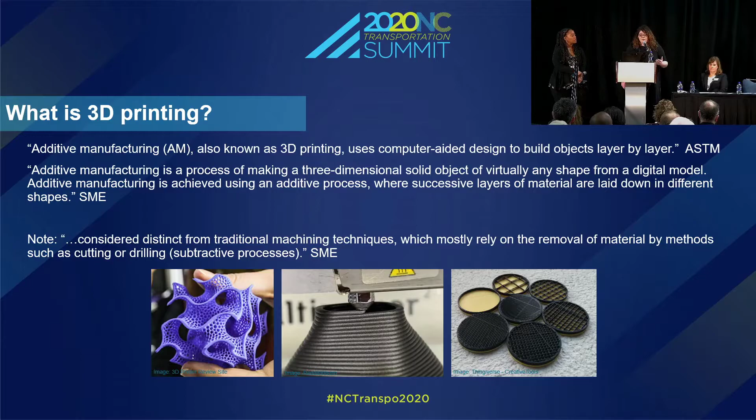So why would you do 3D printing? Well, because it can be faster. If you need a part right now made out of metal, plastic, whatever material, it is likely faster to print a one-off part than to go through the entire conventional manufacturing process to build molds, jigs, design it, drill out the holes. Any kind of complex part requires a lot of time to make. With this, you can get single-step manufacturing. Instead of building a part out of 20 parts, you can make an incredibly complex object that is one part, and these objects fit into the environment where they need to be.

They can also be less expensive. It's much less expensive to print one than to run an entire line to print hundreds if you only need one, and then have hundreds of parts sitting on a shelf that aren't getting used.

With this too, you can get incredibly complex parts. Because you're not using molds or drilling out holes, you can have intricate interior and exterior geometries all in one. So you can have parts that can't be made conventionally, which we'll get into a little bit later. You can also have customization.

There are companies out there that design, say, hearing aids that are custom fit for your ear based on just taking pictures as you go around. That is one version of customization. Things that need to be customized can be, because everybody's parts can be printed on one print bed, but different. So we can print 100 different things on one print bed with the same material and make a custom version for everybody if that's the desire.

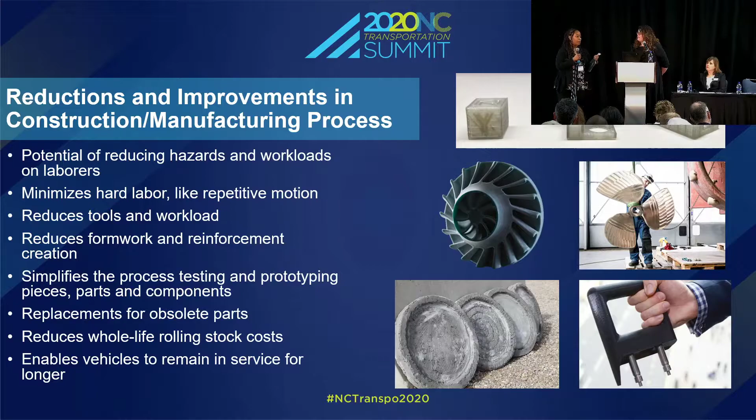So there's a bit of a difference between small scale 3D printing and large scale. Most people, when I ask if they've heard of 3D printing, are aware of small scale 3D printing—3D printers in your own home, or metal 3D printers to print parts. Anything that's really less than a meter cubed is what I'm talking about with small scale.

Now, less common is large scale or large format 3D printing, which is greater than or equal to a meter cubed. So you're talking about, say, a 3D printed propeller that's on a boat—that's the WAMpeller, or WAAM-peller, which was designed to be a more energy efficient propeller to show that you can use this kind of technology in boats.

Or 3D printing cars, which we'll get into a little bit later, all the way up to construction scale 3D printing, which is much, much greater than a meter cubed. That's an extremely rare form of 3D printing—the number of printers in this country that large can probably be counted on your hands.

So I'm going to hand this one over to Brandy.

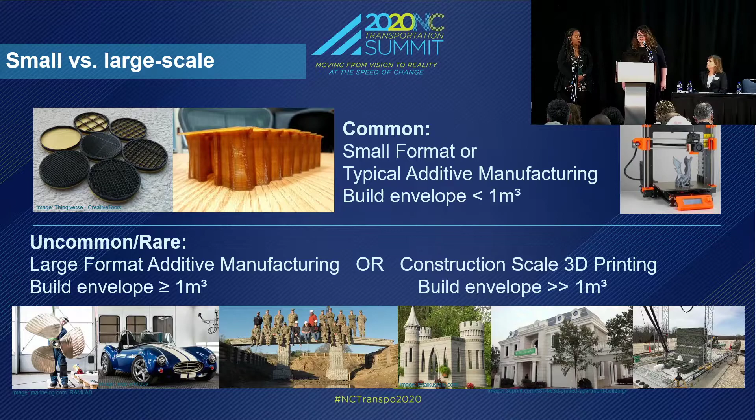Sure. So I have a question for everyone here. Would you rather drive this car on the left? Sure, it gets you from point A to point B, but eventually it's going to have to change—and the way it's going to change is that you're going to have to start driving the car on the right. This car has been 3D printed.

The exterior of the car has been 3D printed. It has a skin that's waterproof. It's also lightweight. So you could stay with the car on the left, your left, my right, or you could drive the car on the right. The thing with this question is that it doesn't matter which one you want to drive. 3D printing is pushing everyone into this new and innovative technology.

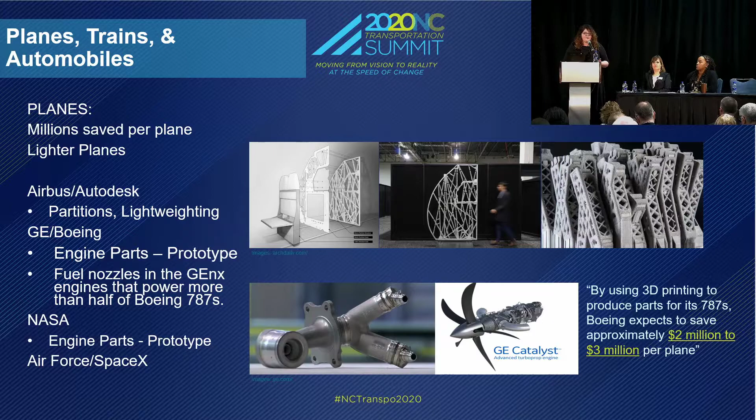We were part of a competition called the 3D Printed Habitat Challenge, where different companies competed to see if they could print space habitats. The reason for that is equipment and astronauts are going to need places to land and live if we are to get more serious about space travel.

That was the wrong way.

Also trains. Typically people think of trains as outdated technology. Well, guess what? Any kind of outdated technology is perfect for 3D printing, because 3D printing is great for creating one-offs, which means if you have trains or tractors that need parts no longer made, you can 3D print these parts easily for a lot less money than making them conventionally.

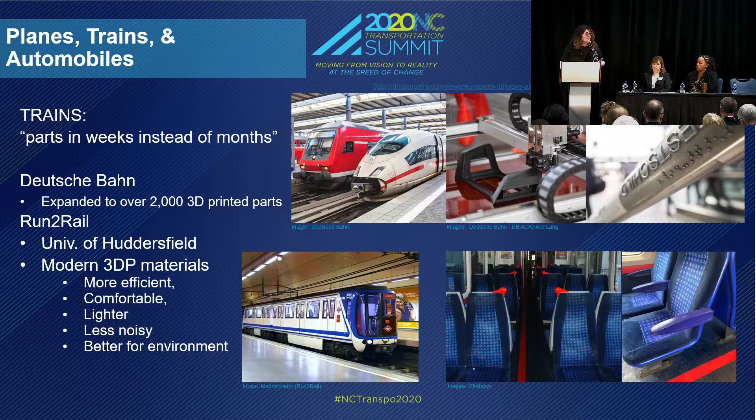Everyone's trying to incorporate 3D printing, not for the sake of 3D printing. A lot of people like to 3D print stuff just to be the first one who's ever 3D printed something. But really where 3D printing takes the cake is when it actually makes the entire process better. One area not really talked about a lot is Olli and Local Motors.

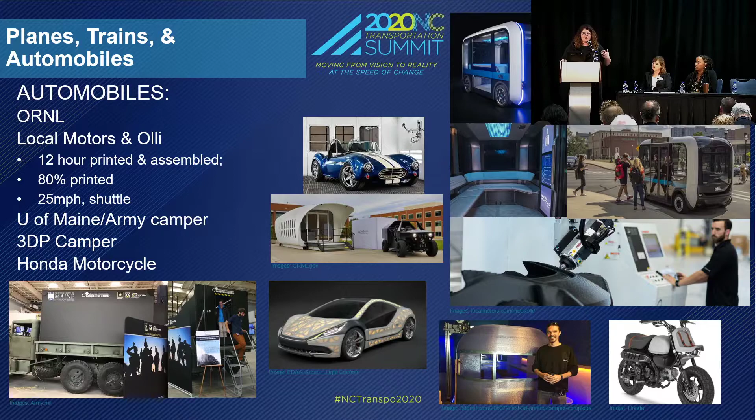What's not being 3D printed in those Ollis? You said 80% is, so what is not being 3D printed? I think it's mostly the battery system, the electrical portion of the Olli. Tires and the glass are not 3D printed. But everything else is, to my understanding. I believe even the rims are probably 3D printed, and if they aren't, they probably will be soon.

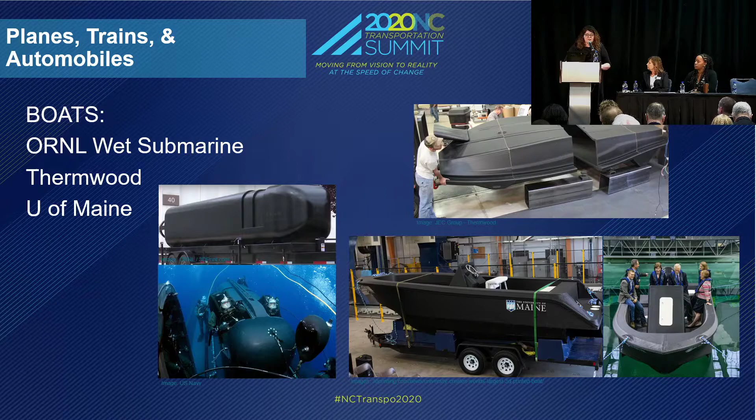Now, like I've mentioned, there's a lot of hype in this industry. People will tell you it's going to revolutionize the world. Well, it's going to revolutionize various aspects of the world, and it might start sneaking in where you haven't seen it yet. Just like the autonomous discussion this morning about how autonomy is already starting to sneak into transportation, 3D printing has done that as well.

Now, when we talk about this as a group, we work with 3D printing for infrastructure, so we're talking about bridges, buildings, etc. So when we talk about hype for our industry, we're talking about people saying we can 3D print a building in 24 hours for $10,000, and it only took 2 people to build this building. I'm going to tell you that's not true. I'm going to tell you that anytime someone says it took me X amount of time to 3D print something, I want you to ask them: how long did it actually take?

Because people have a tendency to talk about print time, which is kind of like the Windows progress bar, where it will tell you it's going to take 5 minutes, and then you've sat there for 3 hours and it still hasn't worked. And it used to be way worse than that. But the point is, if you want a building in actually 24 hours, going by these kinds of terms, saying you can print a building in 24 hours is misleading.

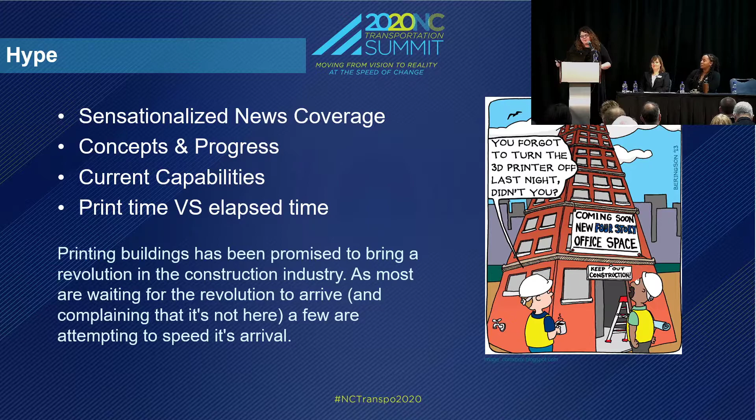And so a lot of the news that's out there, like this little cartoon illustrates: you forgot to turn on the 3D print, turn off the 3D printer, come back the next day, there's a whole building there, a whole skyscraper. It's not quite like that.

Immediately after that is the trough of disillusionment. The trough of disillusionment is where technologies go to die. There have been a lot of great technologies in the past that have been far superior to what we use today that were not adopted because of the trough of disillusionment. Now, what can happen in an industry is people can talk about how great something is to the point where nothing is true anymore, or people don't believe it anymore, and they fall into this trough.

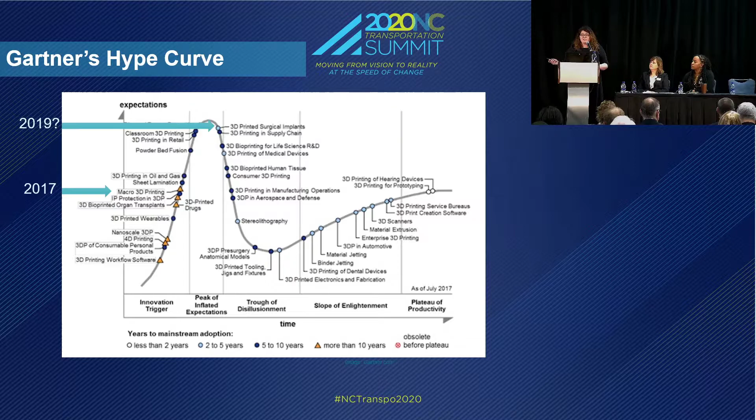Because when we talk about this, we want to talk about real applications, not just the first in the world, the greatest, the largest. We want to talk about where the innovation is actually happening. So how do we get across the trough of disillusionment? That's where collaboration comes in, because through collaboration you can start to understand where applications are and improve technologies to the point where they can be adopted easily. That's what we like to work in.

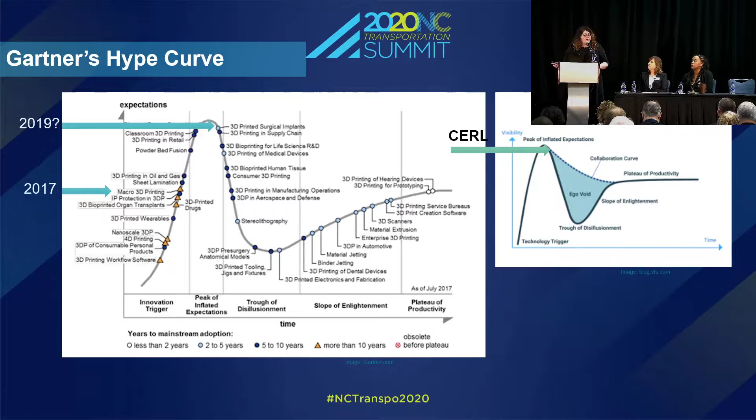So we have a number of collaborators, all the way from Caterpillar to Oak Ridge National Laboratories. We've worked with Skidmore, Owings and Merrill, a structural firm out of Chicago, as well as the University of Illinois. We try to broaden our spectrum, working with everyone from academia to industry to other government labs, in order to make sure that the technology isn't just looking for a problem, but that it's solving a problem, that it's a solution.

So what is additive construction? I told you what 3D printing is. Additive construction is a construction process where a machine uses a 3D CAD model to produce a large-scale component by depositing material in successive layers. We do concrete additive construction, so it's the same thing, but with concrete. You can picture it like putting frosting on a cake, or getting ice cream from an ice cream machine. You build from the bottom up, extruding layer by layer until you've completed a whole object, whether that's an ice cream cone or a frosted cake.

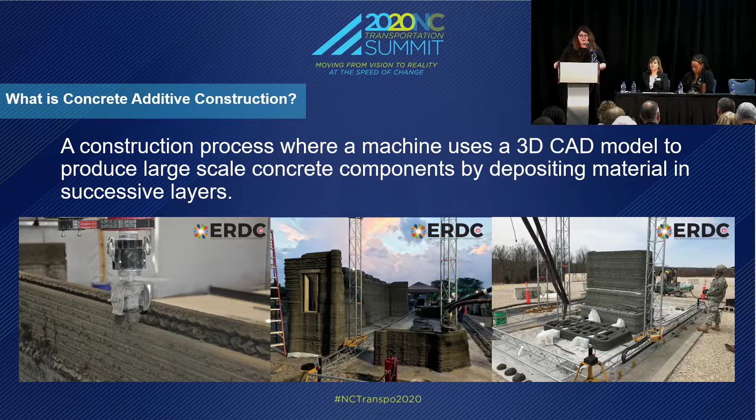We'll get into some terminology here, just for the sake of simplicity. We don't operate in a bubble, we operate with the construction industry, and we want to keep our terminology reminiscent of that industry. Several members of our team are actively involved in the American Concrete Institute as well as ASCE, in order to make sure that as we develop this technology, we are in tune with what industry needs.

For this, we talk about different methods of construction. In regular construction, you have precast concrete specimens that you cast in a factory and bring to the site, then assemble. For 3D printing, you can do something similar, which we call pre-printing objects — you print objects off-site, move them to site, and then put them together, either with conventional components alongside the 3D printed components, or as an entire 3D printed structure.

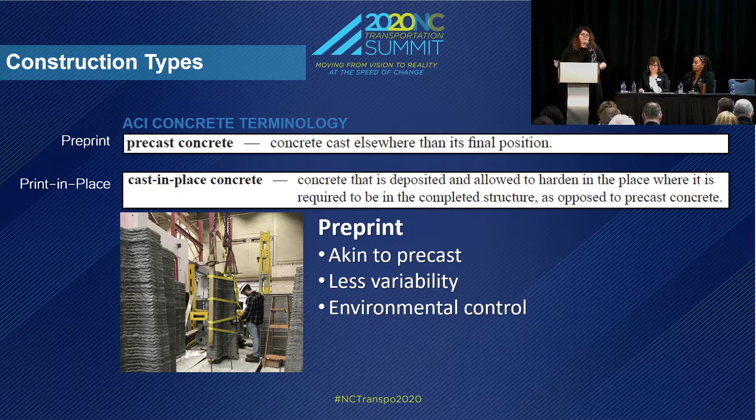The next one is cast-in-place concrete. That's when you're making your foundation — you put up your formwork, cast your foundation, and it stays there forever. We can do something similar, which is print in place, and that's really where we excel in what we do, because most 3D printing technologies are more like a pre-print type technology, where you're printing something that's going to go somewhere completely different. Where a lot of the innovation has happened in additive construction is the ability to print in place.

But with that comes a lot of added variables. Suddenly if you're printing on the ground, we know the ground is not level — even a level slab is not truly level. So we've evolved different methods to deal with these problems, as well as dealing with the weather. If it's raining and you're trying to 3D print concrete, it just turns into mush. If you picture trying to pour a slab and it starts raining, you'd better cover that up because it's just going to lose its strength. As we go through this, a lot of these infrastructure-related issues come to light, and we're working through those to make sure that by the time it hits industry, it won't be a problem.

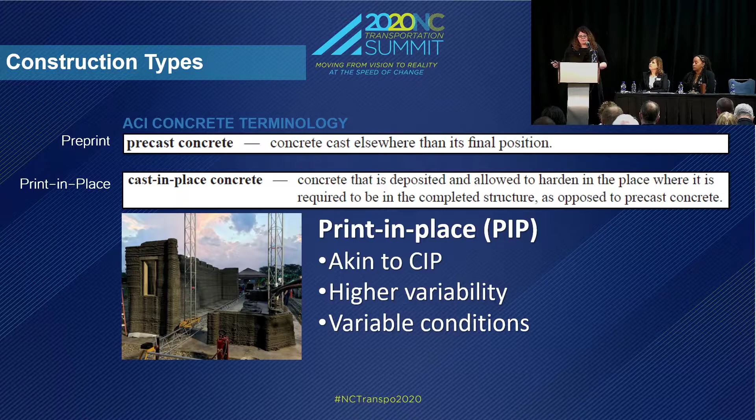With 3D construction, what you really do is take the plans for whatever you're making, whether it's a building or a bridge, and break it out into your different layers. This is a fairly simple plan — we did this as a design for one of our first buildings that we didn't end up actually creating. We printed a few layers and then decided to go with another design. But you can see that as we start from the bottom up, we have to leave gaps — for example, gaps for your HVAC system.

You have to leave gaps for the doors. If you have windows, you need to leave gaps for those too. And so you can break this down into as simple of a 3D model as you can by breaking these into layers. This is what a lot of the 3D printing companies that do construction right now do.

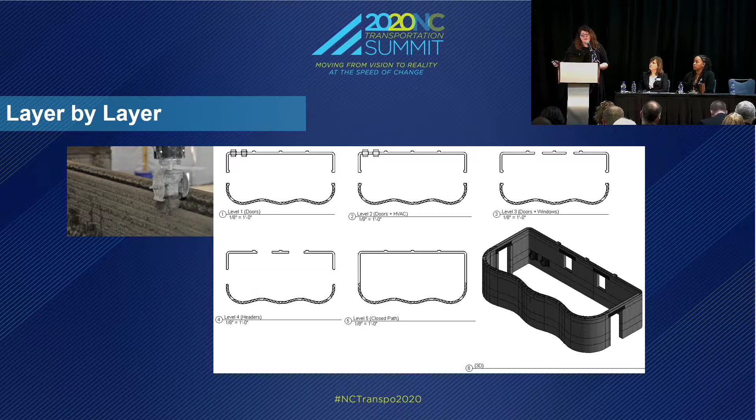They take very few layers and then they just multiply them and print the whole building. Now, we do something a little bit different. We like to create true 3D printed objects, which means every layer could be different. And we'll get into that a little bit later.

So when I talk about hype, there's a lot of companies out there creating buildings and bridges which are prone to this level of hype.

Winsun is a company out of China that has 3D printed an enormous amount of buildings and other infrastructure. Now, a lot of what they say has to be taken with a grain of salt because not everything that they show is actually 3D printed. So you kind of have to look for what the actual 3D printed components are. But overall, they've made huge strides in evolving this technology and showing to the public that you can use this technology to create everything from a mansion all the way down to single homes.

But a lot of these companies end up getting stuck in the competitive stride of trying to sell their current technology based on their projected forecasts for the future. So when people say I can 3D print a building in 24 hours for $10,000, that means I think in 10 years I could probably do that. But today it's going to take a week and $100,000.

But if they told you the real part of it, it's still interesting. And that's the part that I want to emphasize, is while there's so much hype, there's still a lot of really good stuff happening in the field, and you just have to look down a little bit deeper.

So one of the companies that has had a lot of hype associated with it is Icon. When I say 24 hours and $10,000, that comes from Icon. Their houses are beautiful. They can print their houses in just a couple weeks, and they can print them at fairly low cost, and projecting out to the future, it's even lower cost.

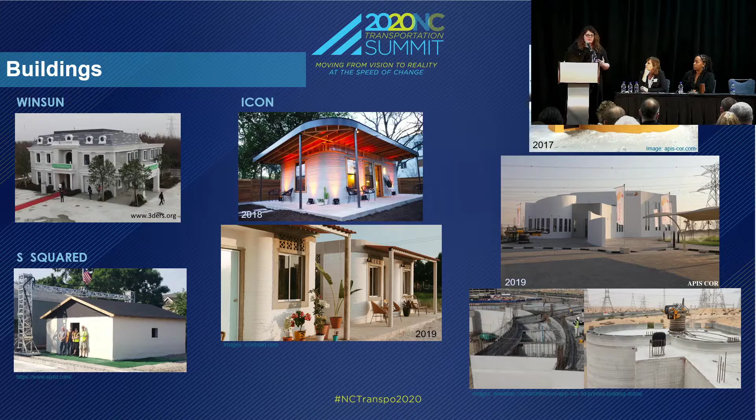And right now in this kind of innovation stage that we're in, you're going to see a lot of square buildings where people are trying to create things that can be produced conventionally. But that's because it is cost effective.

Now, transportation is more along the lines of bridges, roads, right? And so we're going to get into a lot of bridges. So MX3D is a company that came about in about 2014, 2015.

I got this emailed to me at least 100 times over a couple weeks, telling me that people were 3D printing metal bridges. They weren't. It was a concept at that point. They had printed very small things, but the public had already accepted the fact that we've 3D printed metal bridges. These things exist. We're there.

It's the future already. Well, in 2019, just last year, they completed the bridge. It looks completely different. They didn't print it over a canal, they printed it in a factory type of environment.

And while all of that is great, there's real innovation with that bridge. So the things that it was being sold on were things like printing it over a canal. The real innovation there is that it's an optimized bridge for structural engineers.

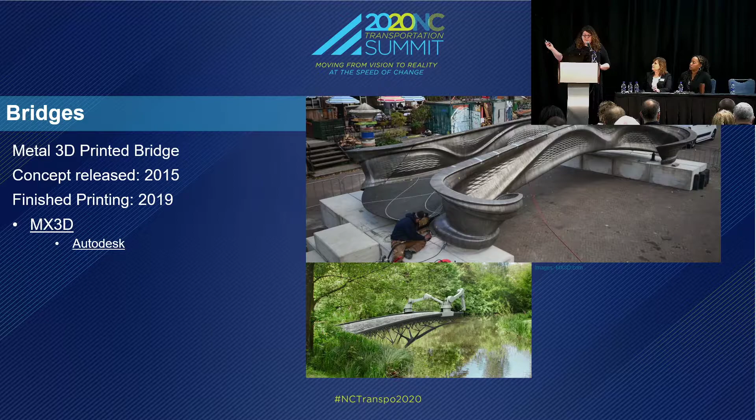And so they worked with Autodesk, and they are still testing this bridge in order to install it over the canal in Amsterdam. But they aren't the only bridge. There's a lot of bridges out there.

This is the world's first 3D printed bridge, in Madrid. That was what went around the news. The really interesting part about this is, like I said, the optimization side of it.

So this was printed in panels and then installed, but all of these panels, each one is optimized. To produce that conventionally, you would have to have an independent mold for every section and then have to cast it, demold it, and everything, if you could even do that.

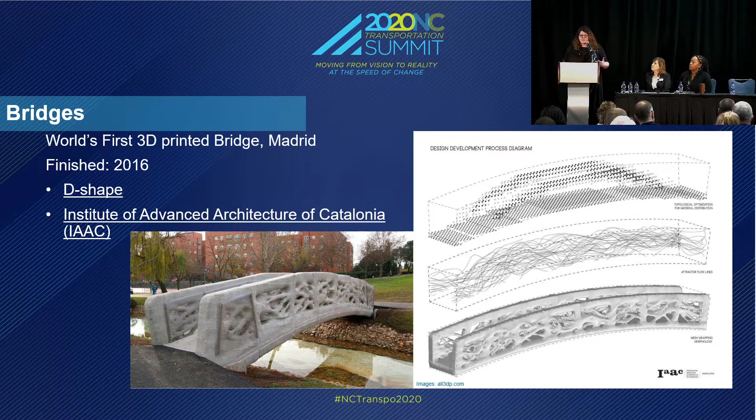And so when we talk about this, we're talking about where are we actually going for the future? And we're going to a future that is more optimized for architects and engineers.

So architects, they're the dreamers, right? They create all these designs, and they're told, no, it's too expensive, we can never do that. Redesign it, over and over again.

And then they get integrated with the structural engineers. Structural engineers say, that's not gonna work, we can't do that. And by the time you get to your end product, it looks completely different than the original vision. Now, those original visions are more real now, because we can produce things this way.

This is a cementitious bridge that was installed in China. The news talks about how it's the world's largest 3D printed bridge. This was just completed last year. One thing that I don't show in the pictures is that this isn't a concrete bridge, right? Weird, right?

They say it's the world's largest 3D printed bridge. Well, when you look at how they constructed it, sure looks like they put a steel bridge across that area, and then they put over this concrete cover. So can you really call it a 3D printed bridge when the majority of the structural portion isn't 3D printed? It's just the shell that's 3D printed. But once again, talking about the world's largest, it doesn't add any value, right?

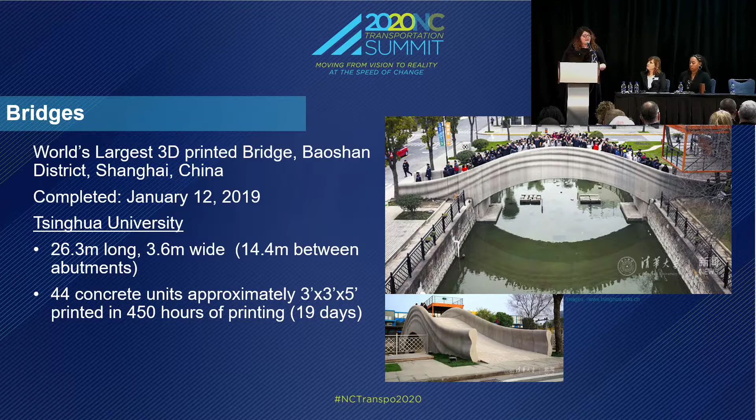But you look at that design, that's a very beautiful design for a bridge. Producing that conventionally for that size of a gap, they'd probably tell you it's too expensive. And you can get far more complicated because these are just the prototypes, right? These are just the firsts or seconds that these companies or universities have done, and they can only get more elaborate from there.

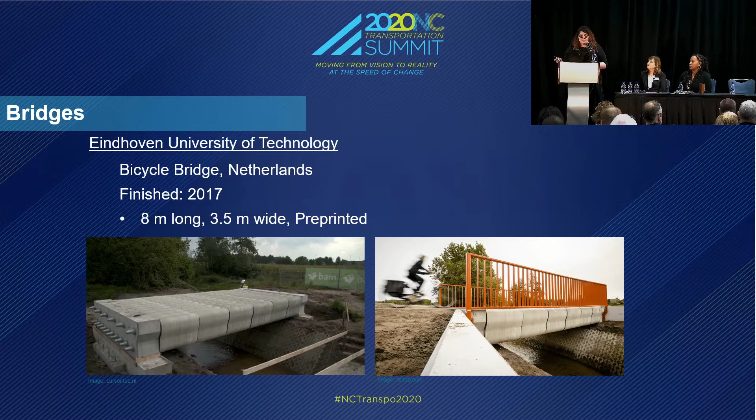Here's a bridge done by Eindhoven that was a bicycle bridge, and basically each section of it was printed and then installed on site. So this was pre-printed. This one, you get what you see, right? It's actually what they talk about is actually what happened. And so these bridges, more and more, are starting to show up in the environment around us. Not just bridges actually being printed, but also the molds, tooling, formwork, as well as direct printed objects.

When we talk about formwork, we can kind of revolutionize it in a way because we're not talking about just wood or steel. We're suddenly talking about creating a polymer 3D printed mold that we can put all different kinds of chambers into, so we can heat and cool it and be able to remove things from the mold and get much more uses.

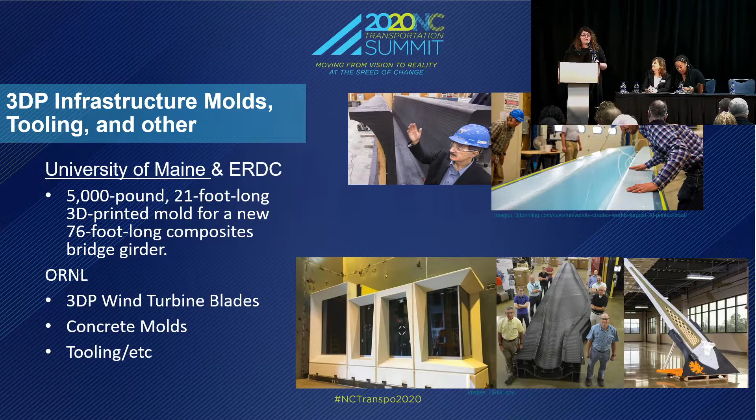We're not as fancy, you know, we're the Army. So what we do is create things that are intended to be for the final structure. These structures may not be used very long, they might be used for two years. So we try to create objects that can be used for what we call expeditionary type operations. This whole program we're involved in was started out being called the Automated Construction of Expeditionary Structures Program, and the idea is to demonstrate and test the capability to print custom designed expeditionary structures on demand in the field using locally available materials. Doesn't matter what object - we're talking about buildings, obstacles, different culverts, and other infrastructure.

And why would the Army do this, right? Seems kind of strange. Part of it is because we can save lives by doing this. If we can reduce the amount of hard labor and the amount of people it takes to create these kinds of constructions, that's less people we're putting in harm's way, whether it's for a disaster relief type operation or infrastructure improvements in other companies or other countries. We could use this technology to improve things across the board.

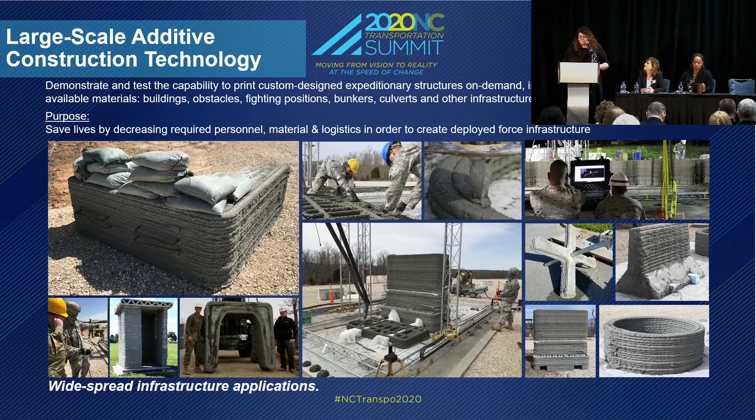And so here's a little video about where we've come from and where we're going.

So we started in about 2015 by building our own 3D printer. Back in 2015, you really couldn't get a large-scale printer. Like I said, right now there's probably, you can count large-scale printers on probably both your hands.

So we designed and built this in-house with our own people. We can print objects with it about 20 foot by 40 foot by 10 foot tall.

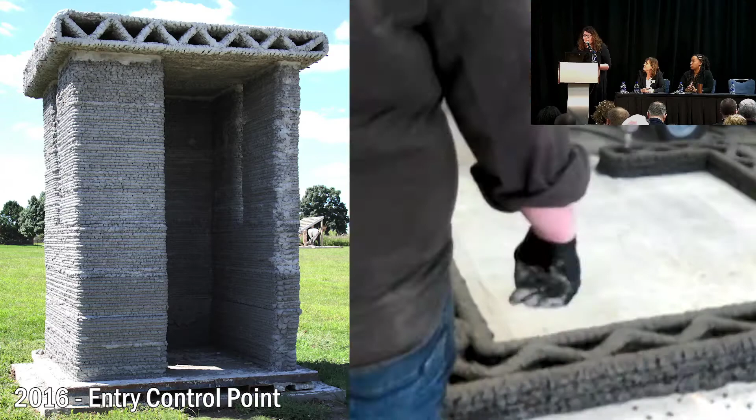We started out by printing a small building called an entry control point, which we printed over several weeks. That was our test structure before we got to our full-scale building.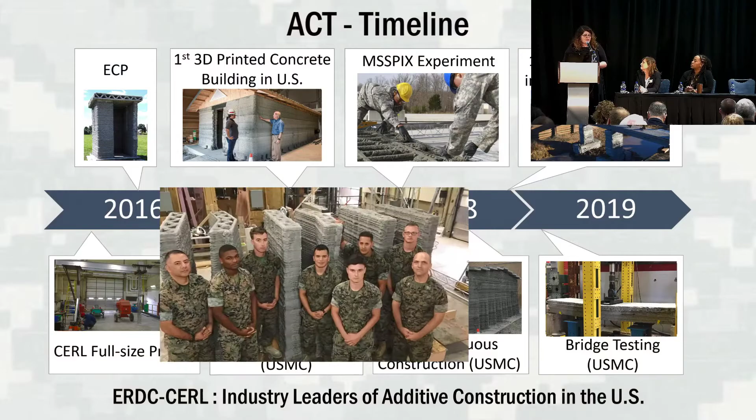Now, remember I talked about print time. That building we printed took 21.5 print hours, but we really printed it over several months because we were building it with our own people.

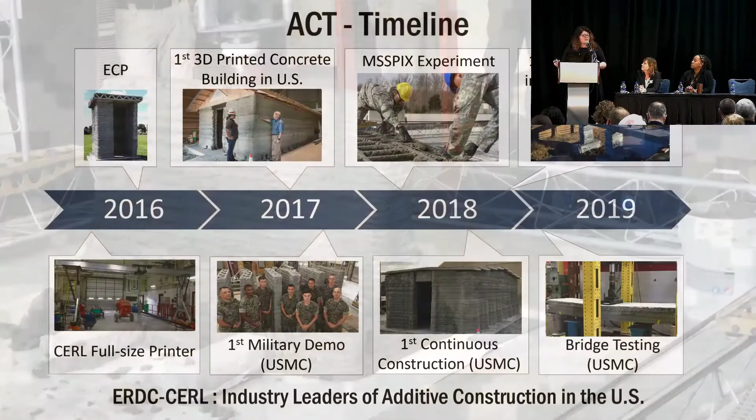From there, we decided we wanted to start incorporating military personnel. So we got the Marines to join us as well as some Army personnel in order to print different objects.

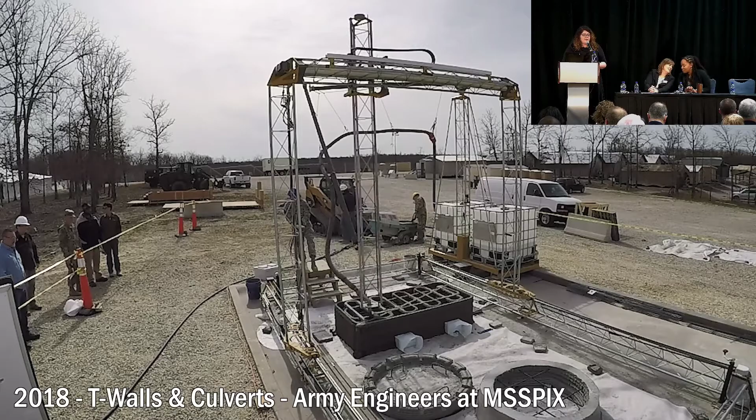We printed some test wall samples to facilitate later construction, and we took this out to Fort Leonard Wood where we printed on site on both a foundation and on unleveled gravel to print different objects, from culverts to Jersey barriers to large T-walls.

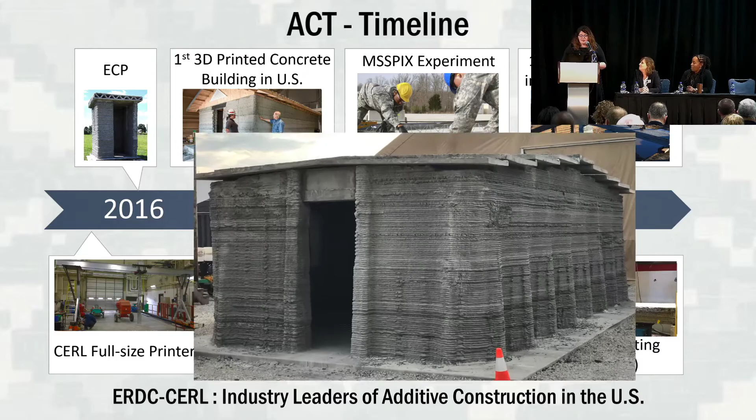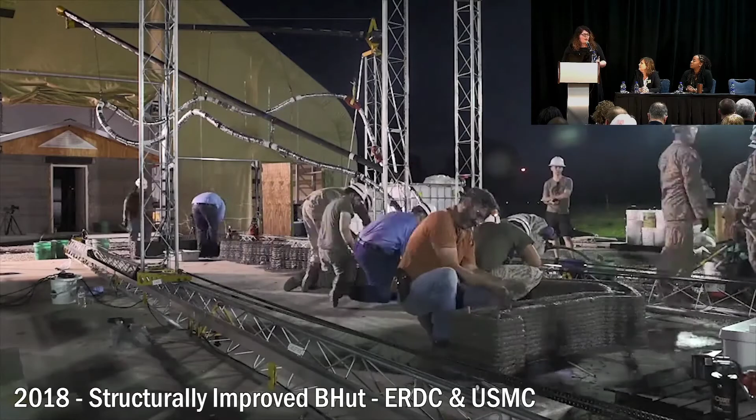We were able to use that testing to produce the second building, which has an optimized structural design to make it stronger. We were able to print this building in 12 hours of print time.

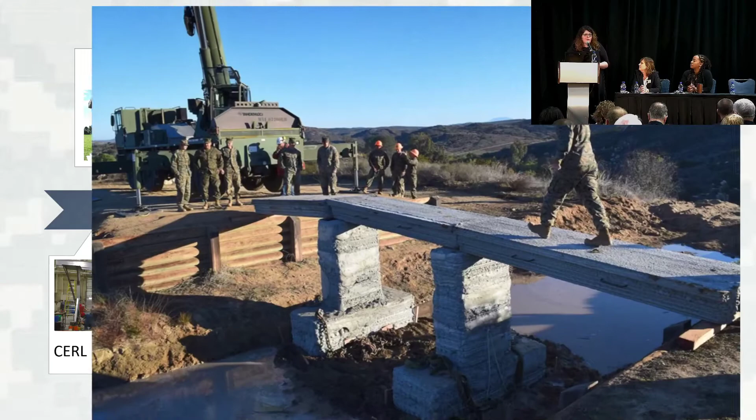But how long did it actually take us? We were pretty much done with the building, the walls, in 48 hours.

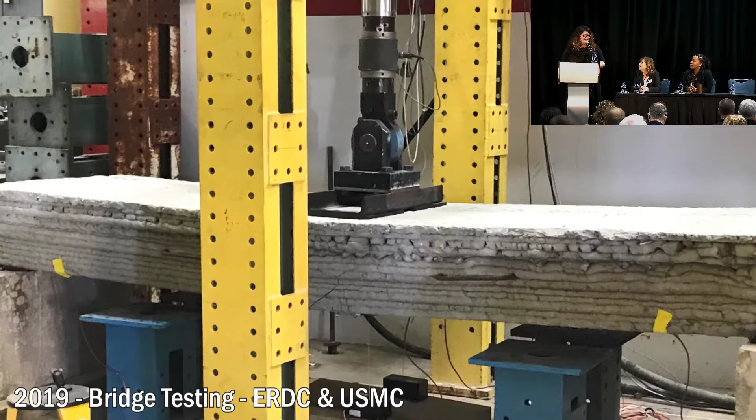From there, we were able to very quickly do a turnaround after 2 months to go and 3D print a bridge down in Camp Pendleton.

Each time we go to these places, we use the materials we can get locally in these types of environments. We're not transporting our own material everywhere we go. We use the local gravels, the local sands, and we mix it all.

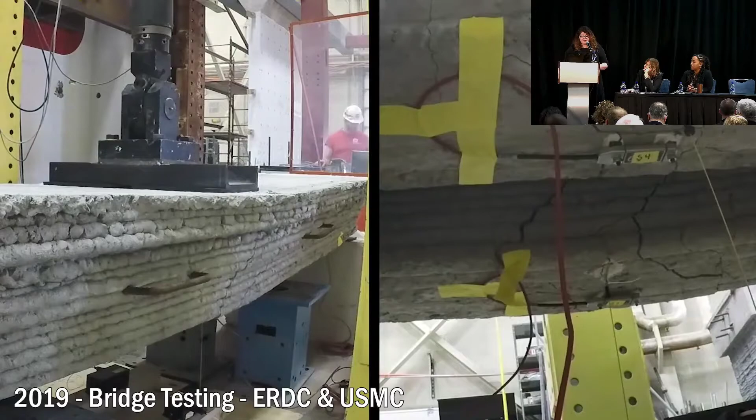From there, we were able to test the bridge, and it actually performed at a higher performance level than we expected, which we'll get into a little bit later.

So why would we 3D print infrastructure? Well, one, because it costs less. We can reduce costs for making these walls or bridges simply because we can reduce the amount of materials you're using, the amount of people, and the amount of hard labor and injuries, as Brandy will get into later.

We can reduce the amount of construction time, which often takes the cake when it comes to costs of doing projects, because construction delays can cost an enormous amount of money, especially to the contractors and the owners.

With this, we can reduce the amount of materials we're making. We can make stronger buildings, stronger bridges, optimized bridges. We can improve the energy performance of whatever structure we're making because we can change the interior geometry of our walls and bridges, and put in different types of reinforcement or insulation and other materials to optimize them.

We can also reduce the amount of people. Does this mean we're going to be printing buildings with 2 people? You can, but when you print with just 2 people, it's a lot of strain on everybody in the environment. No one's going to want to do that. You're going to have a team of probably 4 people minimum to print these structures.

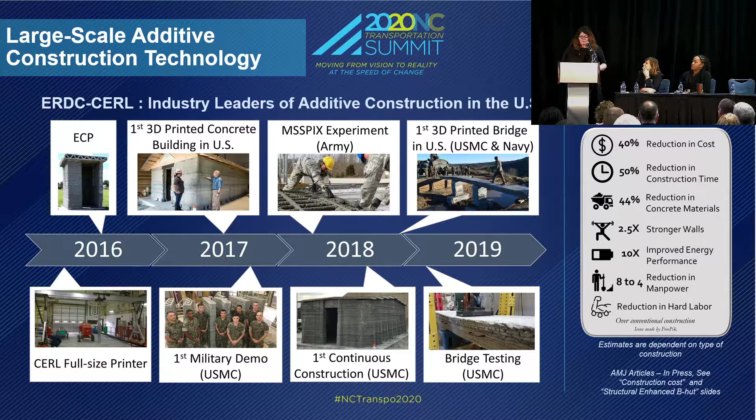So the big thing is reduction in hard labor. We're able to, as researchers, 3D print different things and do construction with our own people. We are not construction workers, right? We are not used to the day in, day out grueling environment. A lot of the people on our team like to sit at computers all day in their cubicles, so getting them to pull out and get dirty is a little bit hard at times.

So when we talk about this, we're really talking about how we can expand who can go into construction and how easy it can be to do.

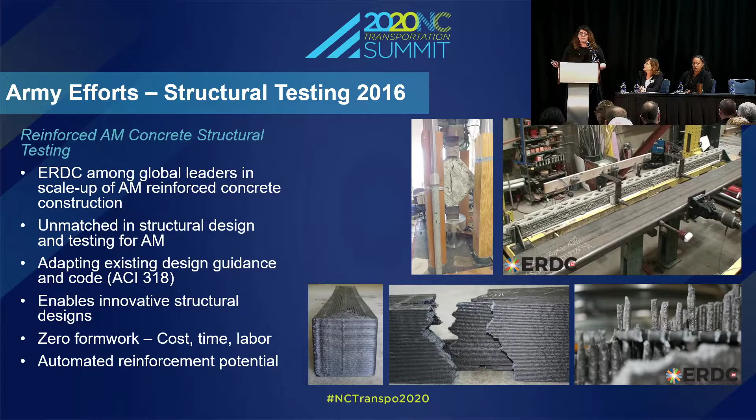We've done lots of structural testing on everything from beams to our wall systems. We've done tests on different polymer systems as well as our concrete systems, and we're going to be getting into more foams and metals in the near future. We're really working on how to refine the existing building codes to accept 3D printing construction.

Like I mentioned, we printed the first 3D printed building in the Americas, with 21.5 print hours over several months.

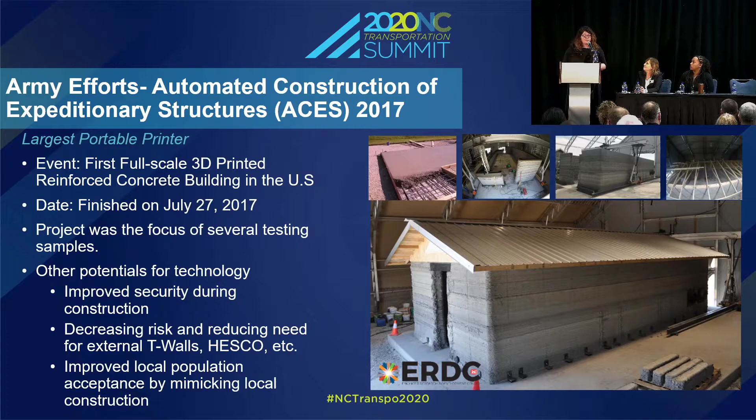And with it, what we did is we printed it hollow, like formwork, with reinforcement in there. We use rebar and other reinforcements, and then we integrated it with a wood truss roof. From there, like I said, we printed wall sections.

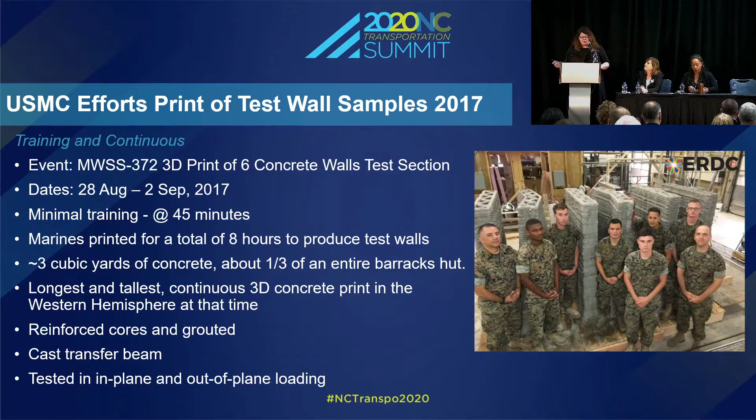A lot of the companies out there have limitations on how many layers they can do at a time, with things like 5-minute wait times or 10 or 15-minute wait times between every single quarter of an inch of their objects. For us, we don't have that delay. For this, we printed different kinds of wall structures to test for making a full-scale building.

From there, like I mentioned, we went to Fort Leonard Wood. We trained soldiers. We trained the first group of soldiers that came out, and we didn't train the second. With 1 day of training, the first group of soldiers was able to train the second group. So we're not talking about engineers and scientists doing construction and operations over and over again. We're talking about people who have never used a 3D printer being able to print entire objects.

With that, we were able to print everything from T-walls down to Jersey barriers and do these on-site operations out in the rain, in the snow, in the hot weather. We basically dealt with it all while we were at Fort Leonard Wood.

We did structural testing on these wall sections in order to validate the building structure we were making. We worked with Skidmore, Owings & Merrill, and we were able to do the design and wall testing for these walls in order to produce a full-scale building.

With this, we were able to test this wall, and we got 2.5 times the strength of a normal straight wall structure. Same material, same reinforcement, 2.5 times stronger with just a geometry change. Now, when you think about that being just the first one, how far can you really take that as an industry to optimize and increase the strength, and potentially reduce the amount of material you're using to make these kinds of structures?

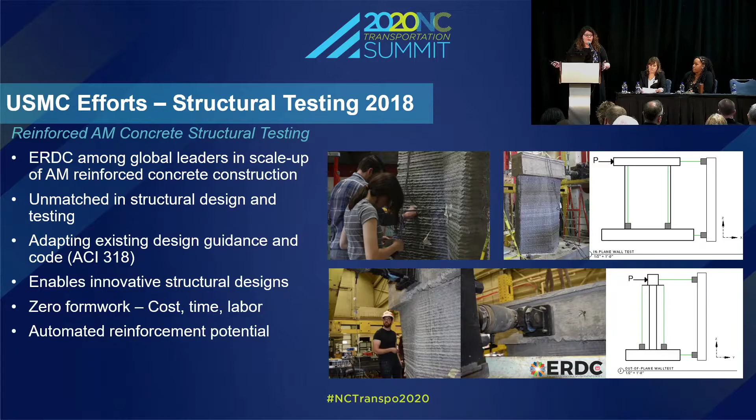And like I mentioned, no formwork. We're not using formwork in this at all. So there's no cost for the wood, no cost for creating the mold, no cost for demolding, no cost for the reinforcement cages, because with 3D printing, you can actually simplify reinforcement using traditional reinforcement technologies.

From there, we 3D printed this building, and the reason we did it is we were testing the 48-hour, or the 24-hour, hypothesis that's been in the industry. So we pushed hard and trained Marines on how to operate this, and their first training was printing this building. They didn't have any prior training in 3D printing. They got very excited about it, so they didn't want to do shifts.

Which meant we actually went home and took a break. So when I say we printed this building in about 48 hours, that includes time for them to go home 12 hours, go back to the hotel, sleep. Print time, like I mentioned, is 14 hours for this whole building. So when we talk about those numbers, 48 hours for printing the walls is feasible.

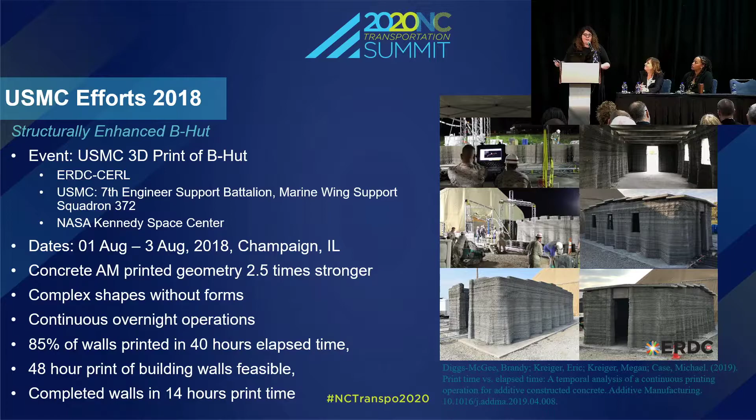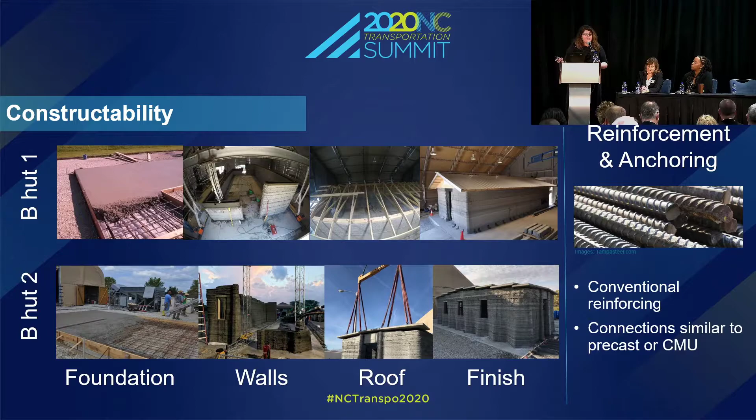With this, we're able to really expand our technology and go somewhere. And like I mentioned, we don't have to operate independently. We can operate with conventional construction, and use reinforcement and anchoring strategies similar to everything else.

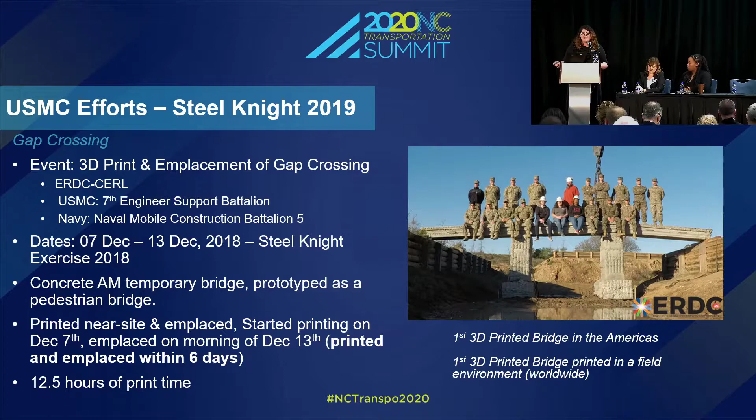With this, we printed the first 3D printed bridge in Camp Pendleton, like I mentioned. The reason why this is important is because there aren't a lot of bridging assets in the military, so we're able to use these for either forward or behind operations. We are able to print and place this in 6 real days, using the materials down at Camp Pendleton.

And when we tested this bridge, we printed the first 3D printed bridge, and then we brought it home and broke it. So you can't go visit the first 3D printed bridge, sorry, because we broke it. We brought it home and tested it, and it was 2 to 3 times the expected strength of what we wanted.

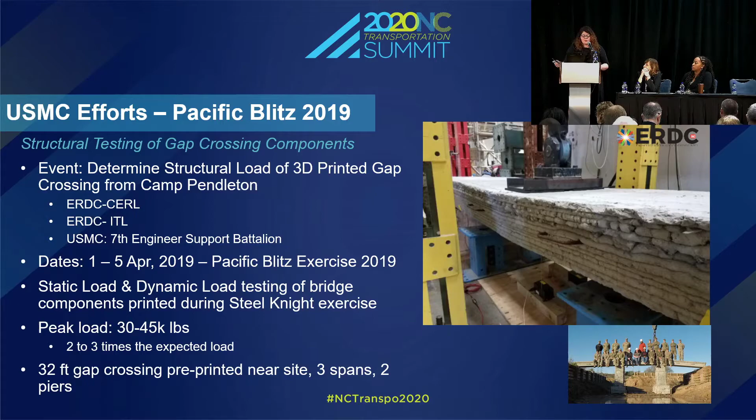And so we printed this as a pedestrian bridge, and by the end of it, this 32-foot long bridge was able to essentially support vehicles going across it. And so as we move towards the future, it becomes more of how do we 3D print vehicle bridges?

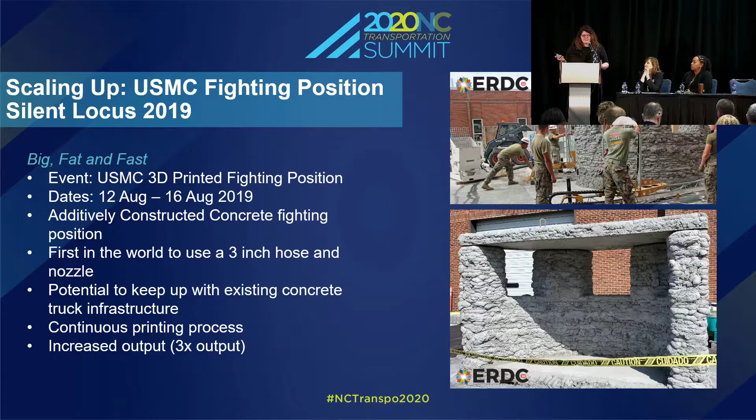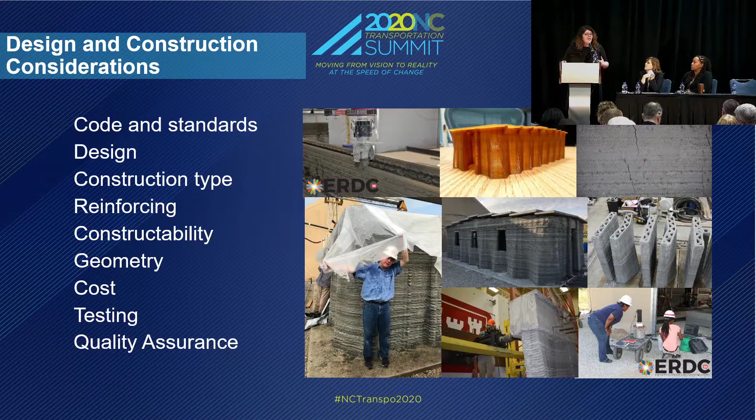From here, we scaled up and we increased our output. So how do we use 3D printers with traditional concrete trucks? Concrete trucks hold a lot of concrete, and if you don't use it fast enough, it cures in the truck. And so what we did is we increased the output, and we were able to produce a structure in one day, essentially, and be able to print the foundation, the roof, and the walls of it with that larger bead size. And so with this, I'm going to hand it over to Brandy, but as we move on, we're talking about everything from the codes and standards all the way to the construction types and really evolving this as a technology. Brandy?

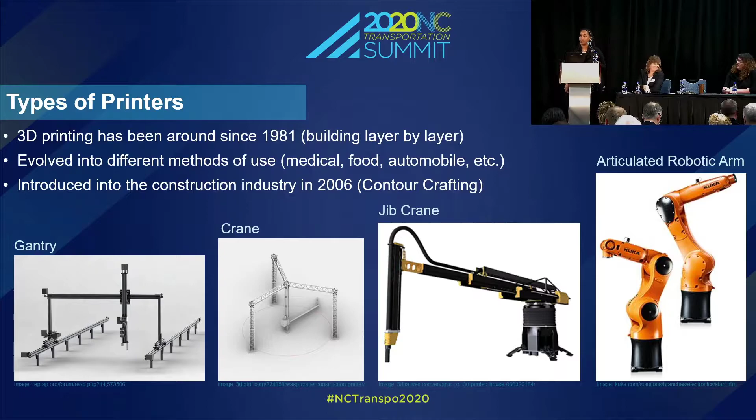What I wanted to talk to you guys about is that there are some standards that are being used right now, but there is a disconnect between actually 3D printing and the type of printer that you are using. So since there are different types of printers, the standards for each printer is different, which means that the safety and the codes that you need for those printers and the printing process will be different for each one, so you can't just write something that's standard to go across the board. The ASTM, the American Society for Testing and Materials, they do have certain codes and standards that apply across the board, like the guidelines, specifications, and terminology, but it cannot be applied to everything.

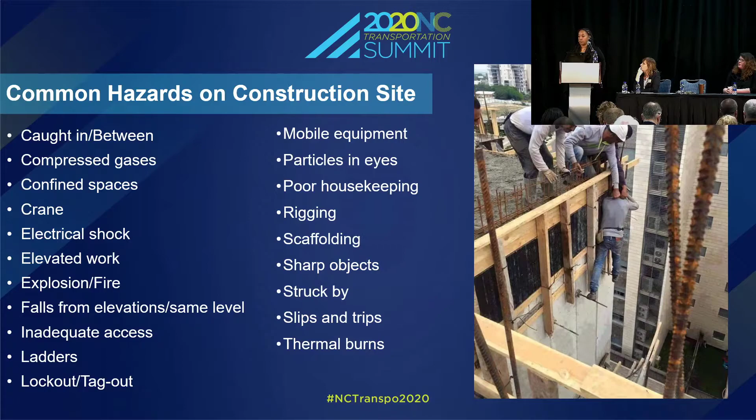And I say that because we do work on construction sites. Typically, or technically, anywhere that work is being done on a site is a construction site, whether it's in any type of industry, construction, or transportation. So these are some of the common hazards that are on construction sites. We normally see something like caught between mobile equipment, scaffolds, ladders, things like that. Sharp objects, those are found everywhere on different types of construction sites. So where you see those hazards, there are rooms for error for accidents.

The accidents are what causes downfalls in some of the 3D printing aspects, the trough of disillusionment pit that some companies fall into because they don't have their safety standards into play whenever they have 3D printing in their companies. So if it's not safe, then you can't continue with the 3D printing process for your company, therefore it will fail. The printer does not care if a human is standing in the way, it will continue to print because it is a machine.

It doesn't care if your fingers are in the way, it doesn't care if your hair is in the way, it doesn't care if you hopped over a beam and tore your calf. It will continue to run.

But these things can happen, so it's very imperative that even if you want to have 3D printing in the transportation or your company, that you incorporate some type of safety and risk assessment in your project management plan, because if you do not, it will fail.

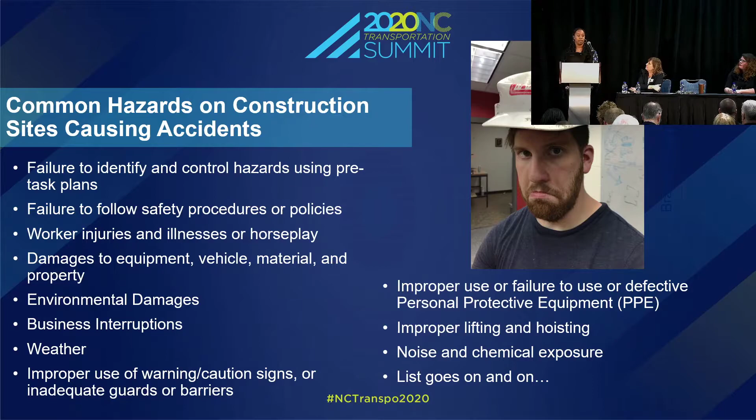So some of the simple methods that we use at CERL, or where we do our construction, whether it's at CERL or at Camp Pendleton, we take into consideration an activity hazard analysis. And what that does is it goes through every step, kind of pre-planning every task that will be associated with 3D printing. It assesses the risks that are associated with the 3D printing process.

It writes it down, whether you need proper PPE, do you need steel toes, do you need eyeglasses, what the environment's going to be. It writes it down. You give that to everyone that is going to be associated with the 3D printing process. After you write it down, you give it to all the associates. They sign it. You give it to a safety coordinator, and you file it away. That way, if anyone gets hurt, they knew what the risks were.

This is also a way to safeguard yourself as well. If you go through the printing process one time, the next iteration that you do 3D printing for your company, you know, hey, last time it was very hot, we may need to have water because we didn't have water last time. Or the next time we print, we probably should have this roadway clear because there's going to be some forklifts coming this way. Or the next time we print, we probably shouldn't print 17 hours straight. So these are some things you probably should take into consideration because there are safety measures. Safety is the health of your employees, as the health of yourself, and it just shows that you actually do care, because you do.

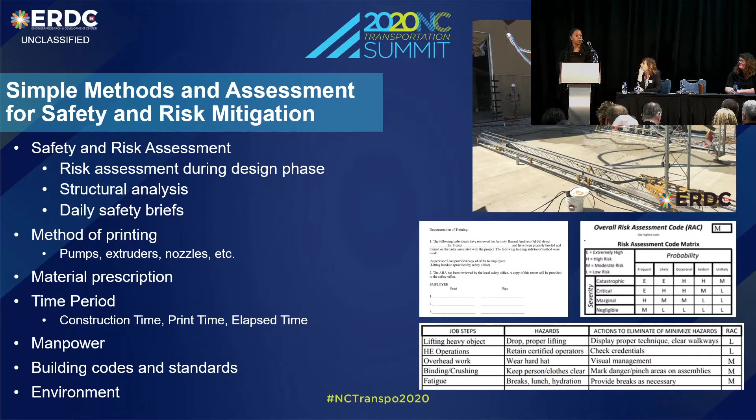So in order for 3D printing to be successful, another aspect is that we continue the research and continue testing. Because when you continue research and testing, the 3D printing process will only become stronger and innovative. The reason you test is that you see what the 3D printing process will do with a material, with a component, and you can only build from there. That is where the innovation comes from, that's where the next iteration comes from. So if you do anything with a prototype and you want to scale up, think of the scaling up with the 3D printing process as well, because there is large scale and small scale.

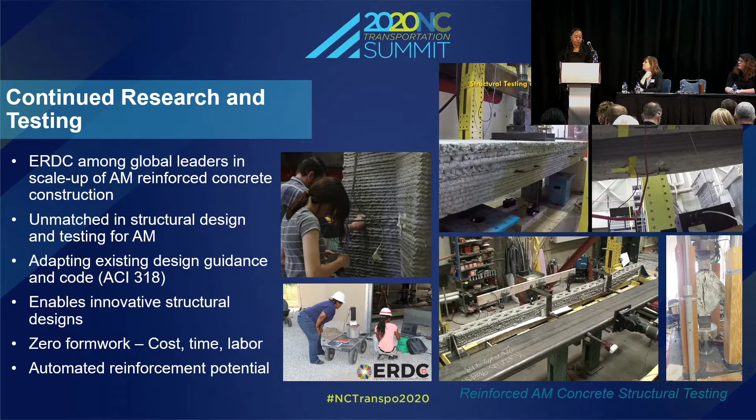So key improvement areas, like I said before, and Megan had touched on also, will be in your reinforcement structural abilities, also the automation process along with robotics. We talked about automation, there was a lot of speaking about automation processes with the automotive industry and trains and things like that. The cost is still pretty high for the acquisition of 3D printing at a large scale, but in the years to come it will dwindle down because we want to regulate the industry with large-scale 3D printing as with small-scale 3D printing. Thermal analysis, energy analysis, material compositions, because there are so many different printers doing so many different things, you can print with a lot of different materials, whether it be something of the bio nature or just a cementitious material.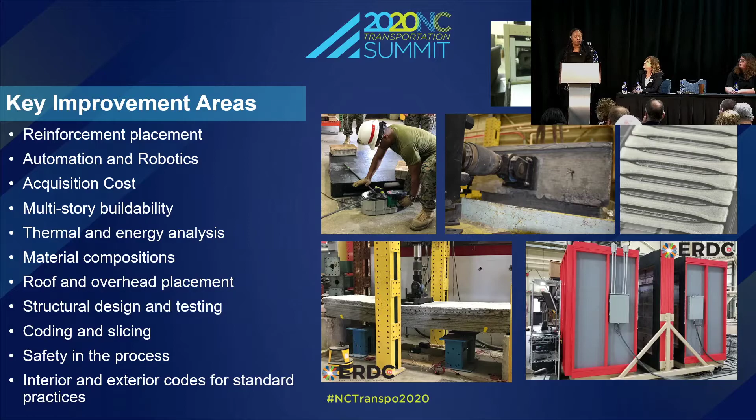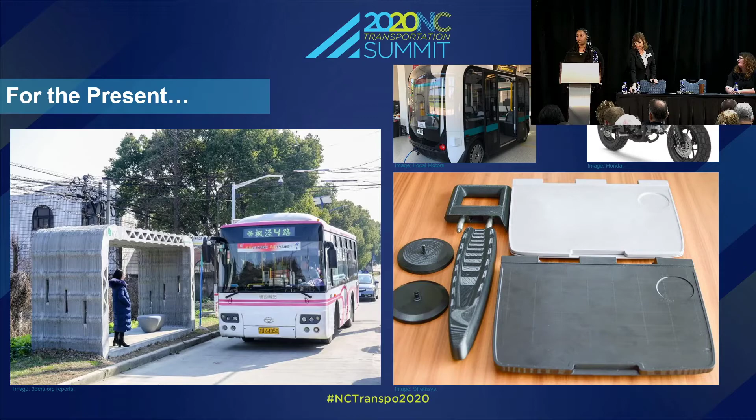So for the present, right now, we do have 3D printed structures. At the top, she did speak about Ollie and the Honda Vibba Monkey motorcycle, which actually has a 3D printed brake line. I'm a little iffy about that, just because I drive a motorcycle as well, and I don't want to trust it. And then we also have the Angel Trains, which in 2019 implemented the tray tables, armrest, and headrest for their trains, just because it is a part that they are continuously replacing. So they said, why don't we just print it? That company is saving a lot of money there.

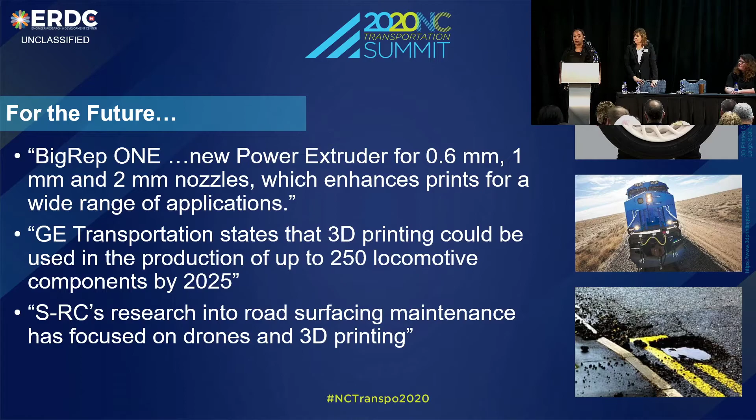So in the future, we are seeing that smaller nozzles are printing larger objects, as you can see with the tire with the rim at the top corner there. GE Transportation wants to incorporate 250 new objects or components into their railways by 2025. And we also have the SRC that would like to start using drones to deposit asphalt for construction, to resurface roads using a 3D printer. So it would be interesting to see a drone go right in front of you to deposit asphalt into a 3D printer that will resurface a pothole as you wait in traffic.

So it's going to take me a while to go through the rest of these slides. Like I said, it's a rabbit hole that we could talk about all day, and we really appreciate you allowing us to have this time to come and speak to you today. Can we give our speakers a round of applause?